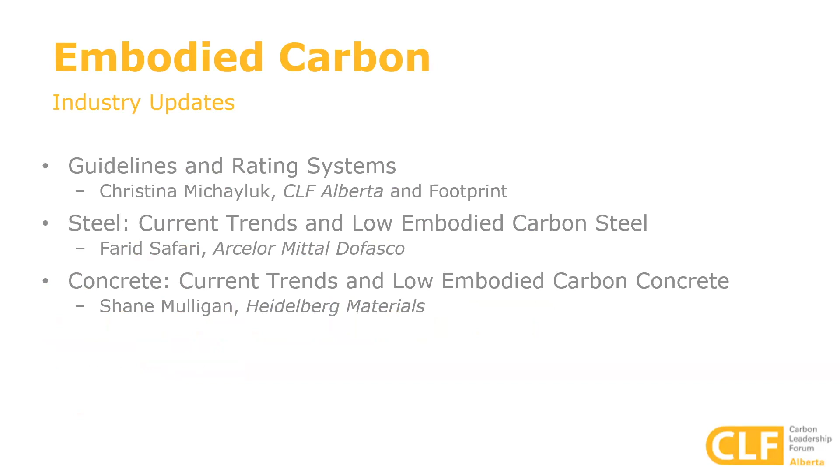So just to start briefly with the guidelines and rating system updates. I know that for those that are really familiar with embodied carbon or for those that are new into the embodied carbon realm, it can be a little bit overwhelming as things seem to be changing quite fast. Over the last couple of years, especially since the release of LEED version 4, we're seeing a large increase in the amount of life cycle assessments that are being required throughout municipalities and different jurisdictions, as well as certifications and standards that are coming up.

So some of the items that I wanted to talk about briefly in terms of guidelines and rating systems are some really exciting items that have been recently released. The first one I wanted to discuss was the National Whole Building Life Cycle Assessment Practitioner's Guide. The name does go on, but we can just call it the NRC Practitioner's Guide, as well as the recent release of the Zero Carbon Building Design Standard version 4 from the Canada Green Building Council, as well as the LEED version 5 public preview.

So just for brief information regarding the whole building life cycle assessment, as I mentioned, we are looking at something that's still really new to the industry, and there's a number of institutions and rating systems that have started adding embodied carbon and life cycle assessments into their own documents.

But through this, we do end up seeing a bit of an inconsistency between how each of these different bodies are governing how life cycle assessment should be done, especially in relation to the baseline design. And then even such things as what type of gross floor area should we be using, what's our specific definition for that, as well as really important guidelines on how we should actually be comparing an embodied carbon assessment from what is the proposed building to what is a baseline building.

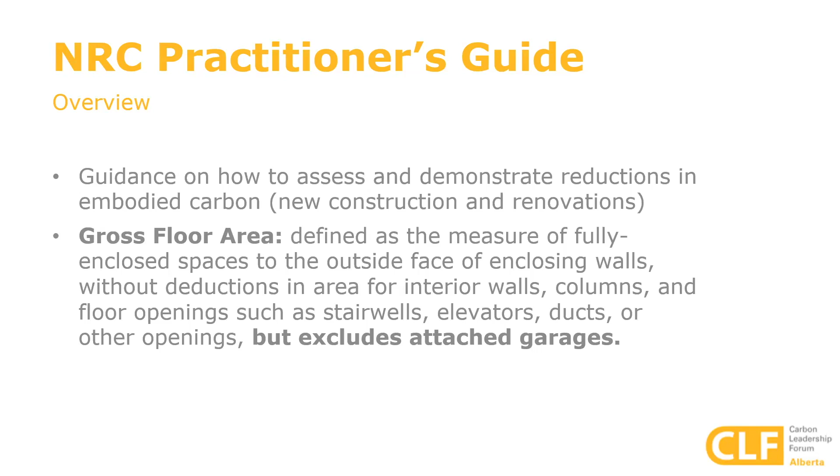Another exciting recent release was the Zero Carbon Building Design Standard from the Canada Green Building Council. So we are now on version 4 of this, and this is really, really exciting. This was just released on June 4th, and it is now open for registration. For those of you that may have been working on zero carbon projects under version 3, or were thinking about doing it, it is still actually open for registration until September, but there is a 2-year sunset on being able to get your project certified. So just be aware that if you are still looking at version 3, you would need to have that project registered before the end of September, and then it would need to be submitted to the CAGBC by the end of September in 2026, and this would be using your issued for construction documents.

So this one here is really exciting in that it's updated some language in terms of its reference documents. So now you can see it actually includes that life cycle assessment practitioner's guide that I had just mentioned earlier. But there are some differences in terms of the actual definition. So they actually use a different intensity number for gross floor area based off of the built floor area, which actually includes underground parking. So there are some differences between these different systems; what your result might be for a zero carbon building may not be what it is going to be for a LEED building or a building under a different system. This also provides some clarity on where you have multiple buildings that will be shared with an underground parking garage.

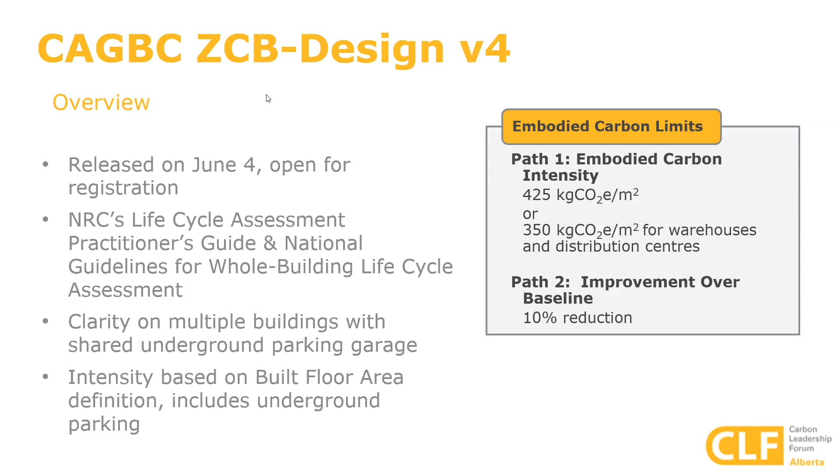And LEED version 5 — this one's a bigger section here. I'm not going to go over every single thing in the slide, but there are some very big updates to LEED version 5 in terms of embodied carbon. Version 5 was released for public comment in April, and I believe the comments have closed now — if that's incorrect, my apologies. This is going to be looked at as a future release in 2025, and there may be some minor updates based on the public comment that comes out.

In terms of the key impact areas, we're taking a look at decarbonization as one of the really big impact areas, in terms of operational carbon but also embodied carbon. Through that update, embodied carbon assessment is now considered a prerequisite, but how that's looked at is not necessarily a whole building life cycle assessment — it's a bit of a different scope of work, but they now prioritize it to the point that it's going to be required for all LEED projects.

In addition, projects pursuing platinum, which is 80-plus points, will actually have to reach specific decarbonization thresholds, which includes embodied carbon. It states that you need to hit 2 points within one of the specific LEED credits for this. Another important thing to note is that what we see pretty much across the line for life cycle assessments is that this includes the enclosure as well as the structural systems.

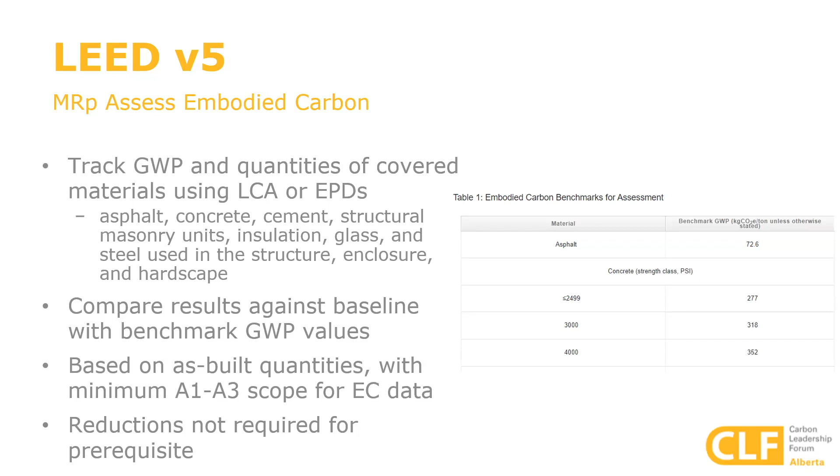So that was a very fast-paced, big look at the industry updates for guidelines and embodied carbon rating systems. LEED v5 will be looking at coming out next year, and the zero carbon standard is already out. But just one thing to keep in mind is that we want to make sure that we're looking at the definitions and understanding what our gross floor area definitions are. It's really exciting that we're taking a look at other ways of looking at embodied carbon, and it's not just going to always be a whole building life cycle assessment, that there's going to be other areas of opportunity as well.

First, a quick introduction on the impact of buildings on carbon emission. If we take a look at overall global GHG emissions, we see the different sectors contributing to it. On the right, you see buildings contributing to almost 28% of global carbon emissions.

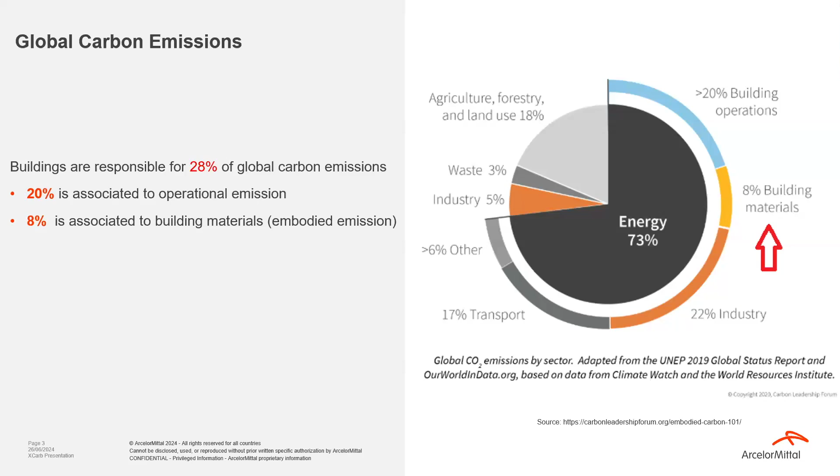Of that 28%, 20% is associated with operational emissions and 8% with building materials, which we call embodied emissions, which we'll go over. So that's how important it is—it contributes significantly to global carbon emissions.

If we define operational versus embodied emissions—this is from the CLF website—embodied carbon represents the carbon emissions associated with making building products and construction, from raw material extraction to manufacturing, transportation, and end of life disposal or recycling. You see different sections here: raw material supply, construction, installation, and the operation and use phase of the building, which is mainly about the energy use of the building, the operational carbon emission, shown in blue.

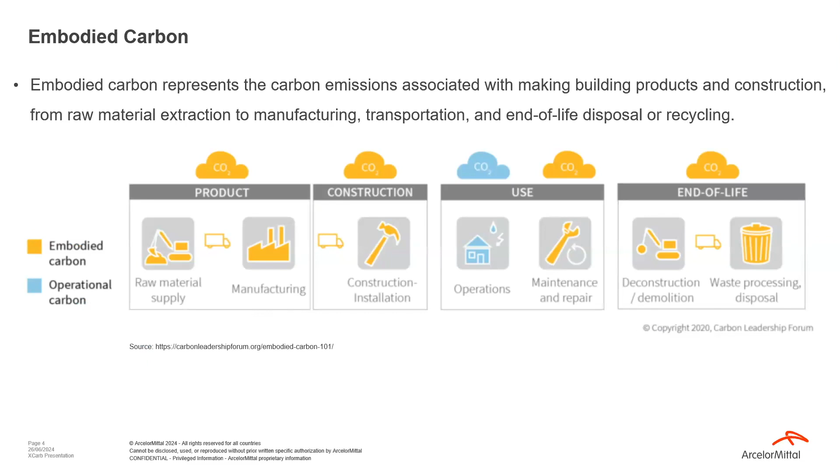And then why that matters. We know about climate change, global warming, and environmental problems, but in our business, why does that matter? It comes down to policies.

Federal greening government strategies and municipal and other level policies are being legislated for embodied carbon. The federal greening government strategy requires disclosure of embodied carbon in structural materials of major projects as of 2022, reducing embodied carbon in structural materials by 30% starting in 2025, and conducting whole building life cycle assessments by 2025 for major building and infrastructure projects.

Fortunately, you already described the details about LEED version 5, but yes, here also LEED requirements apply—you can get up to 6 points from embodied carbon reduction pathways depending on what you choose, plus there's a prerequisite for embodied carbon in LEED version 5.

Also, different cities and municipalities are day by day coming up with new policies on green buildings and embodied carbon strategy. The City of Vancouver is targeting a 40% reduction in new construction embodied carbon by 2030. Toronto, Edmonton, Calgary and other cities are just examples of how important this is.

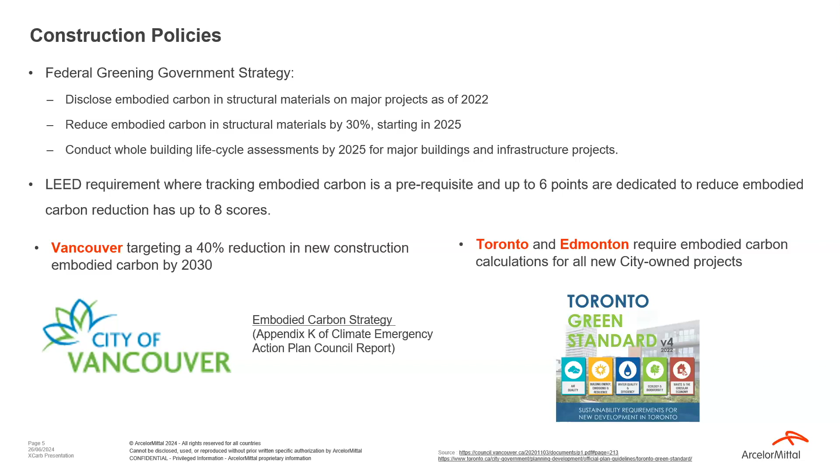Now that we know the importance of embodied carbon in construction, what do we do about it in steel? This is where our offering comes in—ArcelorMittal's offering of recycled and renewably produced steel as a low carbon emission steel offering, under the name XCarb.

What is it? If we look at conventional steel making versus the new processes: on the left, we have the conventional method using the blast furnace to make liquid iron for steel making, followed by the basic oxygen furnace. In the basic oxygen furnace process, a huge amount of CO2 is released in the operation, with the blast furnace being most responsible for the overall process of steel making.

In the other method of steel making, we have the electric arc furnace. This is the process where, using high voltage electrodes, either scrap as a recycled material or direct reduced iron is used to make steel—it's melted with that high voltage electrode. So it uses electricity, and depending on the grid's carbon intensity, it results in a low carbon emission steel if the grid is clean or low carbon.

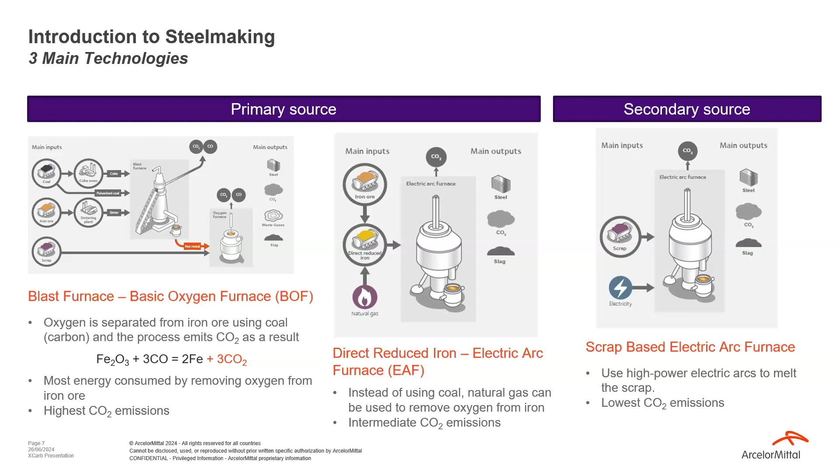So this is the one that we target in XCarb. And when it comes to secondary material, we see how it is on the global scale for steel demand over the years. Going forward, we have more secondary materials and scrap, and we can leverage it.

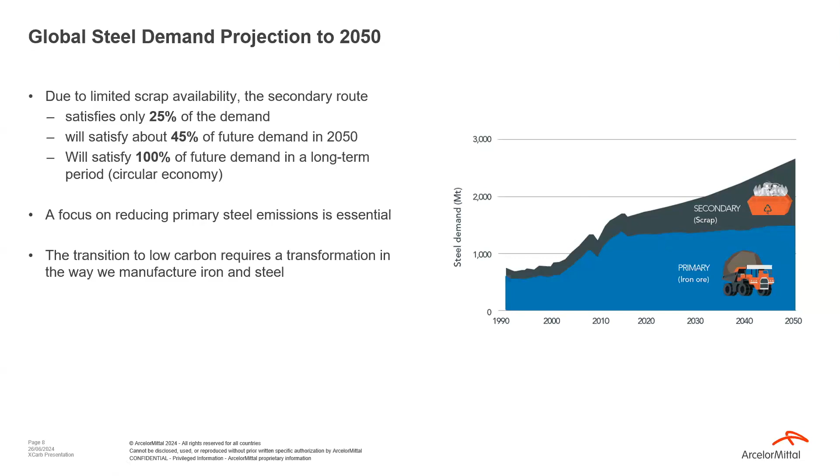But in North America, the situation is even better. There's a huge amount of secondary material that can be used for steel making. The transition to low carbon requires a transformation in the way we manufacture iron and steel, and using this secondary material is of high importance.

So XCarb, in a schematic, can be seen here: 100% renewable electricity guaranteed, certified with a renewable energy certificate to ensure that renewable energy using solar, wind, and hydro is connected to the same grid that our asset is using, and also a 70% minimum scrap content to ensure recycled material is used in that process.

It can go up to 100% scrap content based on the grade of steel and the application it's made for. In places where high impurities matter a lot, we can't go with a very high level of scrap content, so we usually go with 70%. Where it doesn't matter, it can go up to 100%.

Also, for the whole process, we performed the LCA, life cycle assessment, according to ISO 14044, and the assessment includes scope 1, 2, and upstream scope 3. That is independently assured and certified by DNV Consulting, and certificates were issued for XCarb.

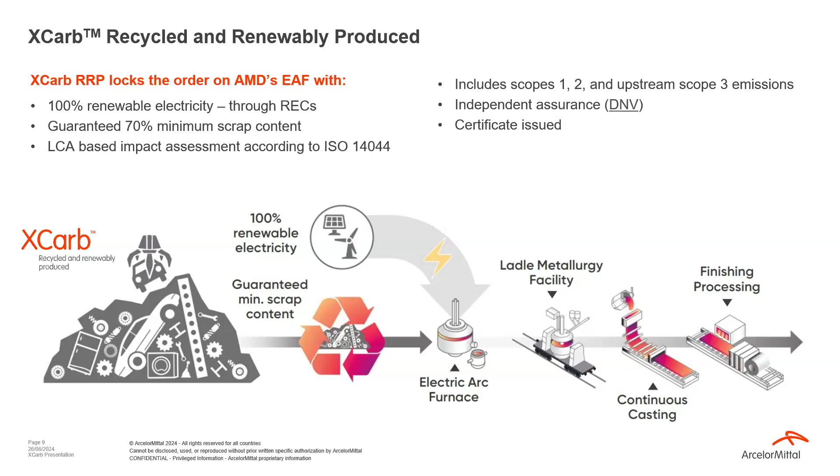So basically, XCarb guarantees the EAF process, minimum 70% scrap, and 100% renewable electricity.

Now getting more into the LCA process, how we performed it using the ISO standard, and also cradle to gate. So for the raw material here, this is the boundary defined by ISO 21930 for construction.

So for A1, which is basically raw material supply, and for the transportation, we use site-specific data for the Dofasco facility in Hamilton. That's the primary data that we use.

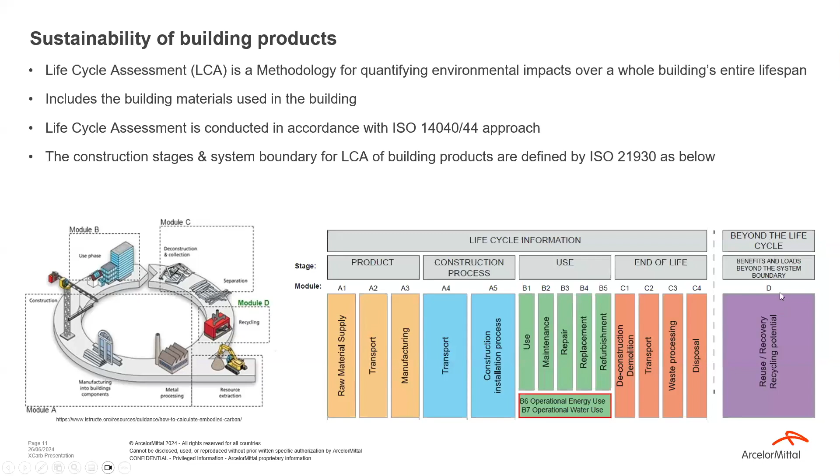And for the manufacturing, if it's the finished products, for the assessment we use manufacturer or industry average manufacturing data for the LCA. We also consider end of life and recycling, module D, which is optional to be reported in the EPDs.

So these are the different environmental impacts mandated by the requirements in the PCR, product category rules, to be reported for construction and steel products.

Global warming potential, which is the very important one, associated with embodied carbon, acidification, eutrophication, smog formation, and non-renewable energy demand.

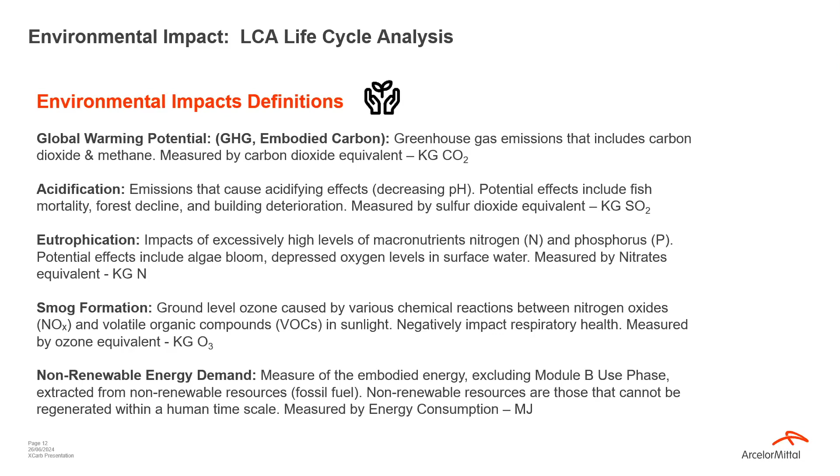And then as a result of this process, for the XCarb process, EAF, renewable electricity, and the LCA that I explained, we came up with the EPDs.

That's like a commercial asset to ensure the embodied carbon for the steel products, for the flat roll products at the gate of our company, as well as some finished construction products that you see here: 5 finished construction products, including steel cladding and roofing, steel deck, cold form section, hollow structural section, as well as corrugated steel pipe, which is used for culvert and drainage applications in municipalities.

And for the steel coils that go out of the gate of our facility, we use, as I mentioned, the primary data from our operation.

For the manufacturing of finished products, we use industry average data for Canada, using information from associations: the Canadian Institute of Steel Construction and Canadian Sheet Steel Building Institute. For the corrugated steel pipe, we use data from the Corrugated Steel Pipe Institute.

And all these EPDs are third-party reviewed and verified, and available free on the Dofasco website, which is here—the address—and you can access it.

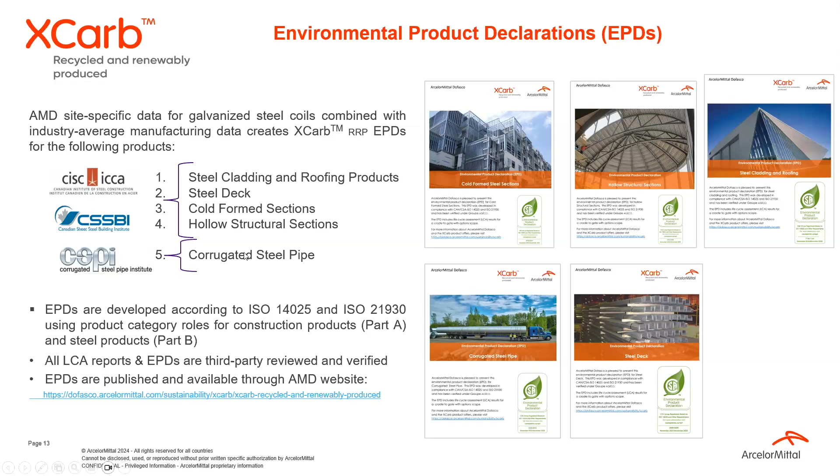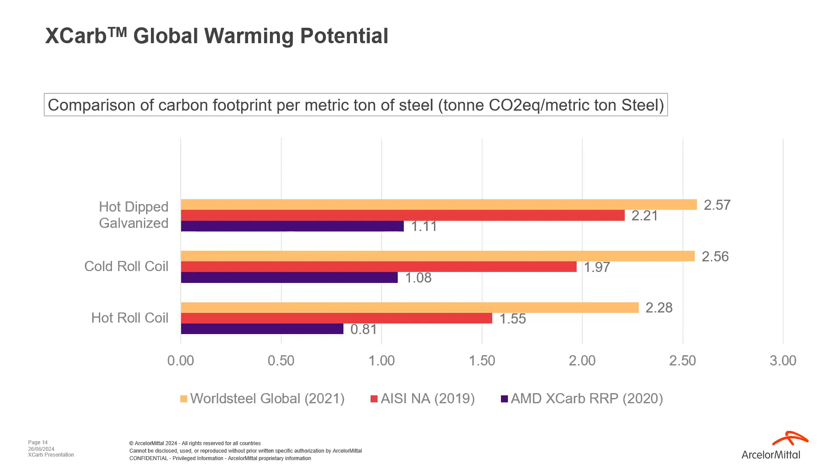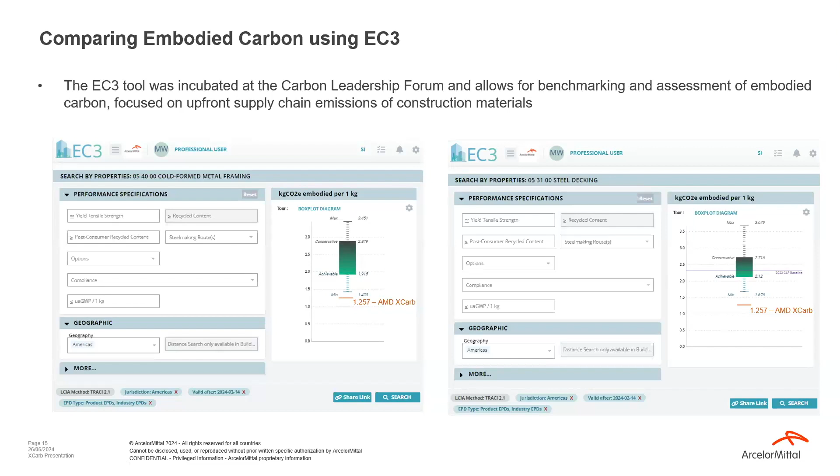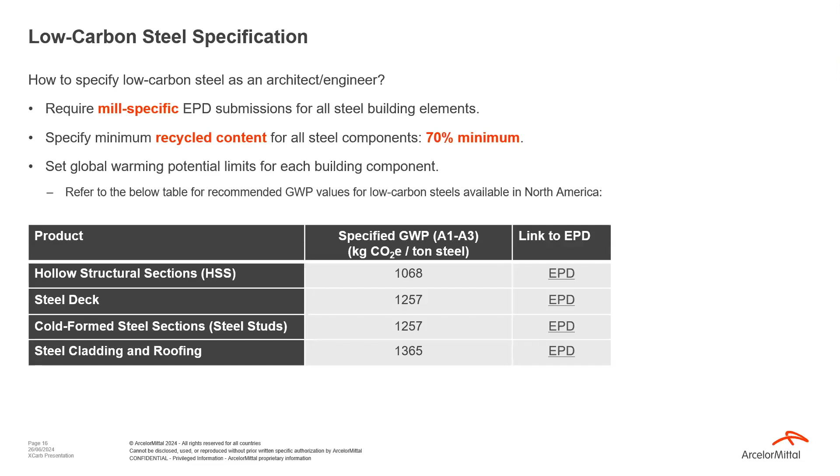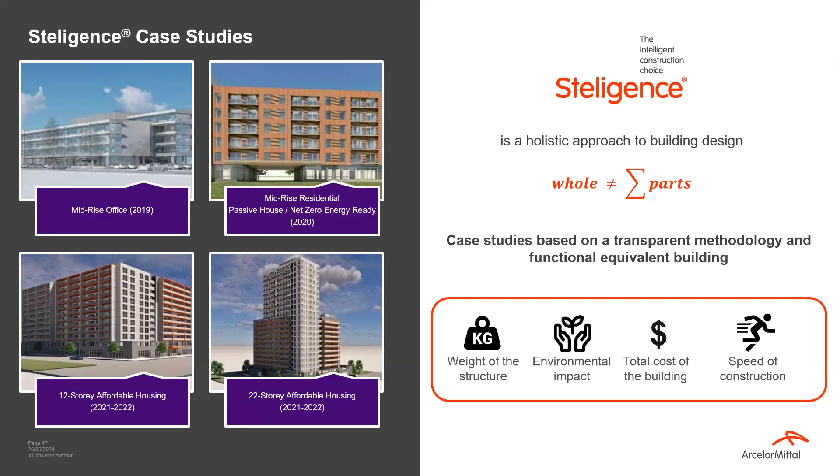We are in the process of implementing the XCarb offering shown in this presentation—those low emission values—into this Steligence initiative to show the competitiveness of steel in building construction. If you have any questions about the XCarb offering or our low carbon emission steel, feel free to reach out to me. For Steligence, our project manager, Matthew Winters, will be ready to answer questions or present upon request about our Steligence projects.

Thank you. Thank you, everyone.

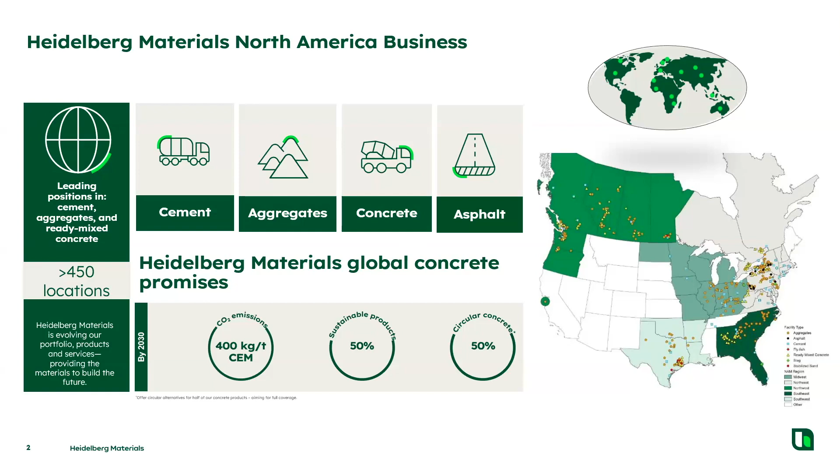So you've all seen the stats, I'm sure, on sessions like this previously, or presentations around embodied carbon, that cement and concrete contribute very significantly to the embodied carbon footprint of a given building, as well as global greenhouse gas emissions. And I think the industry has been very progressive and active and proactive in getting ahead of this issue. We ultimately represent 5 to 8% of global greenhouse gas emissions, largely driven by the fact that we're the second most utilized substance in the world next to water. And as a result, we have a large amount of emissions that we need to reduce.

And at the global level, with the Global Cement and Concrete Association, Portland Cement Association in the US, and Cement Association of Canada, over the last couple of years, all of these industry associations have published roadmaps to the goal of net zero concrete by 2050, and highlight all the different technologies and levers that the industry is going to utilize to get towards that goal.

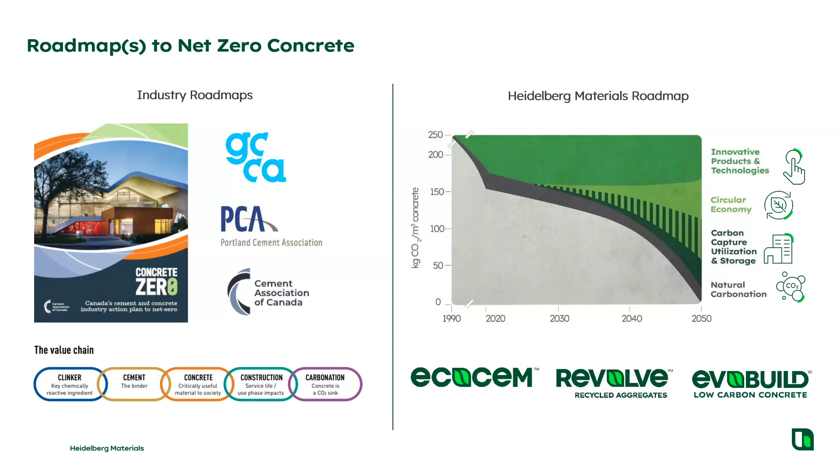As Heidelberg Materials, we are part of all these industry associations and committed to these same targets, but also have our own roadmaps that we've developed at global and national levels, which is ultimately going to bear out in the products that we have, whether it's lower carbon cements, recycled concrete aggregates, or low carbon concrete.

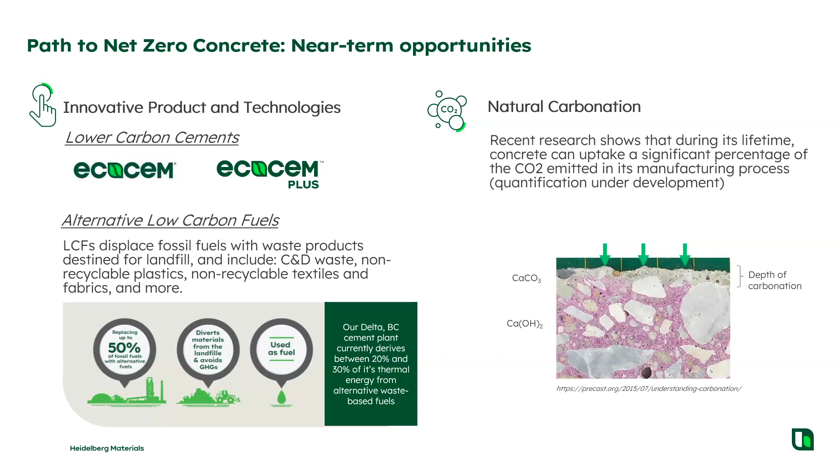But when we're talking about low carbon concrete, where we're at today, we definitely get the benefit of anything that happens upstream with cement production. But from a concrete perspective, we have a lot of different engineering levers at our disposal that help us to reduce the carbon intensity associated with our products.

The big lever that everyone's likely familiar with, the supplementary cementitious materials or SCMs. These include products like slag from the steel industry or fly ash from the coal industry. I'm sure many are aware in an Alberta and prairies context that fly ash and coal are going away as a result of the 2030 goals that the province has set in terms of shutting down coal plants. So certainly the fresh supply of fly ash is likely to disappear over the next several years.

But we're not concerned as an industry. There's many decades worth of fly ash that has been built up over the years at different landfill facilities, and it's already in the CSA codes and standards for cement and concrete that allow us to go in and harvest and process that fly ash to create a product that's going to perform the same as fly ash and continue to do the work that it does within a concrete mix and reduce the overall carbon intensity.

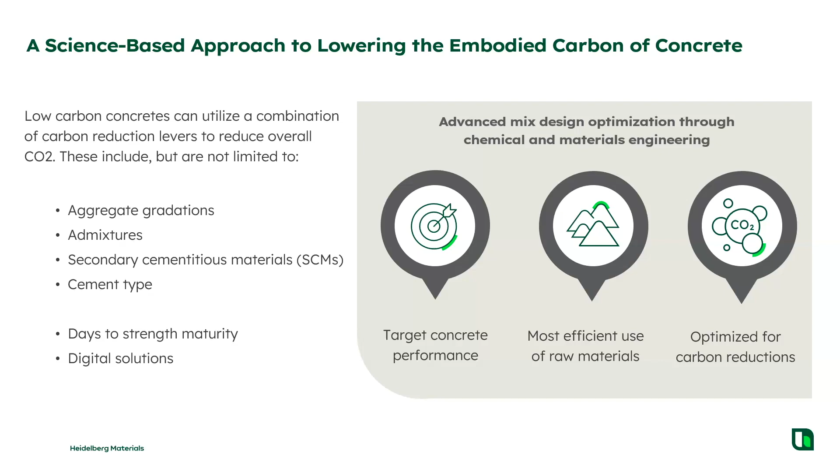How we measure the impact of all these different levers is through the use of environmental product declarations. At our Heidelberg Materials facilities throughout North America, we've invested in the ability to generate product and facility-specific Type 3 EPDs. There are a number of different producers throughout Canada that are undergoing this or have them currently available, and you're going to see it really take off over the next several years. I think it will become the standard as part of doing business as a concrete producer, much like mix tickets upon delivery. But they're not without their challenges as well.

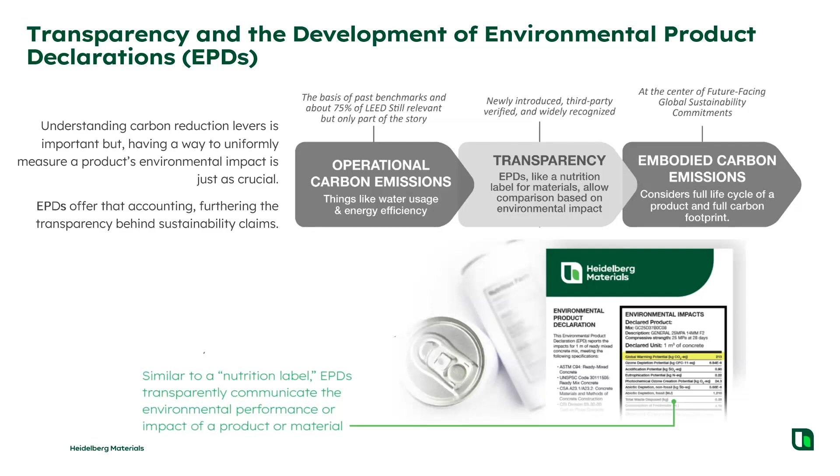EPDs are very specific to the mixes that they're designed for, and they create some administrative challenges when it comes to what is published, how that's managed, how it's replaced, how it's updated, and then ultimately how it's being used. Worth knowing for concrete is, most people are concerned with one number on an EPD, which is the global warming potential or carbon intensity. But that one number is generally built of three different numbers that are the different modules from the LCA process as part of an EPD.

Module A1, of course, is the extraction and upstream production of the raw materials, which in concrete's case is very much disproportionately driven by the cement, or more specifically, the clinker content of that concrete mix. That's the main driver when it comes to all emissions that are associated with concrete. Module A2 is the transportation of the raw materials to the manufacturing facility, and this is very dependent on your haul distances and what mode of transport you're utilizing. Generally speaking, the transportation of aggregates is the biggest contributor to this module.

And I like to use the example of Vancouver as being well advantaged in this space, where most of the aggregates are transported in the Metro Vancouver area using barges, which is about an order of magnitude less carbon intensive than trucking of aggregates. But in a landlocked area like we are in much of the prairies, that's not an option. We have to utilize trucking, unfortunately, or rail in select examples where that might be possible. And as a result, the carbon intensity associated with concrete in the prairies is higher than it would be in Metro Vancouver.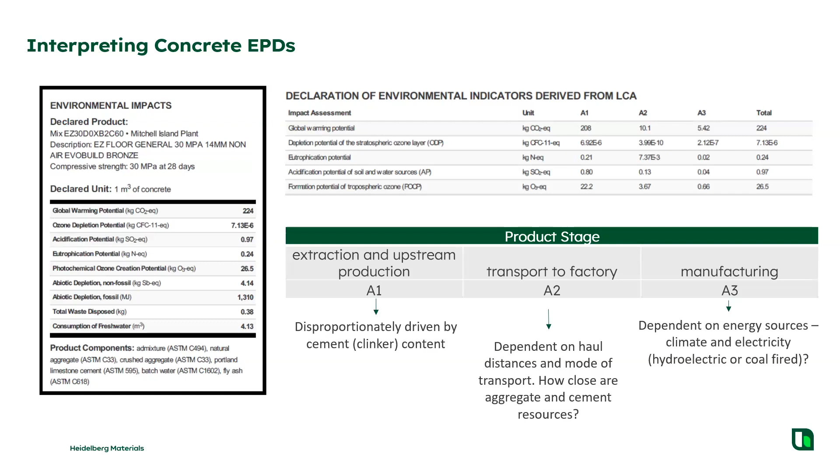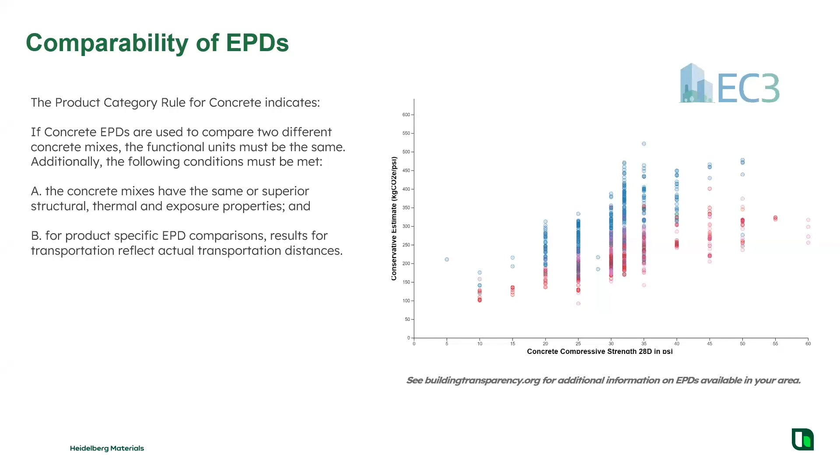And that brings me to another one of the challenges that we have with EPDs. So right in the product category rule for concrete, it states that concrete EPDs can only be compared to one another if they have the same or superior structural, thermal, and exposure properties. And the unfortunate thing about that with EPDs is that a lot of those properties for concrete are not mandatorily listed on an EPD. And EPDs can vary quite widely with concretes, depending on strength, depending on exposure class, and many different project specific considerations in terms of if it's pumpable or not, availability of raw materials at the time of issue.

So really wanted just to highlight for this group on the call today that there's some great tools out there, like the Embodied Carbon in Construction Calculator. It's going to be very powerful in time to enable designers to have an insight into what different carbon intensities are possible for different concretes. But right now, most of those concretes aren't comparable because you don't have the context necessarily, unless it's explicitly listed on the EPD, that it's the same exposure class for the same type of application. So it makes the job very hard for designers to interpret these properly, and it makes it hard for the concrete producers to make sure that they're managing that data properly and publishing the right sort of information.

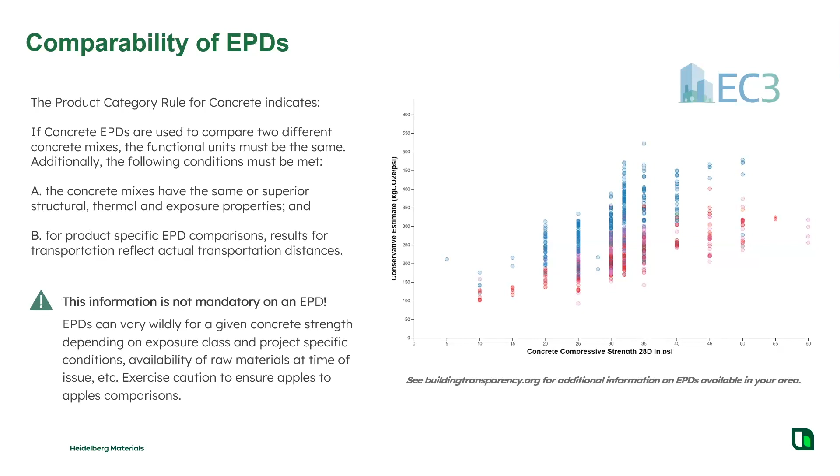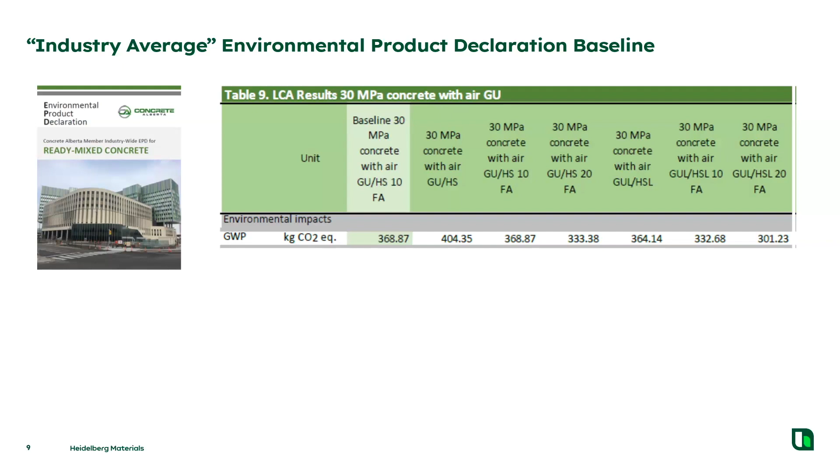Other EPDs that you might be familiar with are the industry average environmental product declarations, and there was the national one that was published back in 2017. And in 2022, there were more regionally specific industry average EPDs. The Alberta one is highlighted on the screen. Generally speaking, the one value that's important to designers, or the one that we'd like to be most important to designers, is the light green highlighted column, which represents the recommended baseline for the specific strength of concrete that's being specified. In Alberta's case, that generally refers to a type GU cement concrete mix with 10 to 20% SCM use, depending on the different strength and exposure class that it's addressing.

All the other columns to the right are intended more for concrete producers that don't have the ability to generate product-specific EPDs, so that they can attest that their concrete is approximately equal to the different designs that are denoted there and submit those GWP values as part of their ability to demonstrate adherence to a given specification or policy. And ultimately, what they're able to demonstrate through that is about a 10 to 15% reduction, depending on the mix, as a result of using either Portland limestone cement or the higher use of SCMs.

The one caution I would issue when it comes to the use of the industry average EPD is that sometimes they're not based on strictly air or no air designs. It is important to pay attention to the exposure class when it's listed, because as an example, some of the mixes are for an exposure class C-XL, which by virtue of the CSA standards actually are representative of 56-day mixes as opposed to 28-day mixes. So there does need to be some discussions between the concrete producers, the structural designers, and the design teams that are setting these different baselines and thresholds for their projects to make sure that there is an understanding of the concrete that's ultimately being called for and what the implications are from a carbon intensity perspective.

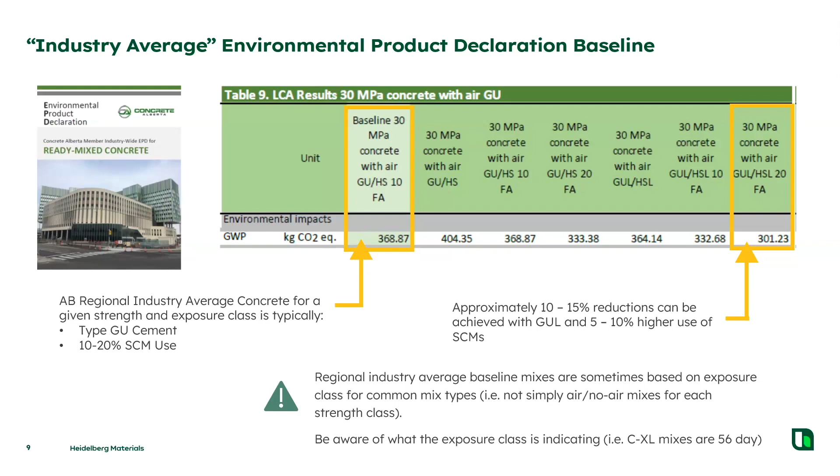I would highly recommend the use of this document in terms of informing your projects and how to specify lower carbon concrete. This is Concrete Canada's guideline for specifying low carbon ready-mix concrete in Canada, and it provides step-by-step guidance in terms of generating a carbon budget for concrete, which has a designer outline all the different concrete elements they're looking at, the corresponding strength and exposure class, and then a corresponding maximum GWP value or threshold.

Ideally, that's informed by regionally industry average EPDs, but the designer is ultimately able to make that decision themselves.

The one thing I would highlight from this document, which is very important, is that if you encounter a concrete mix that is not listed in an industry average EPD, or you're dealing with a special case like a high strength concrete, the recommendation provided is 130% of the corresponding strength class for a given element. So if you had a high strength footing, you would be taking 130% of that 318 value to represent a high strength edition of that mix.

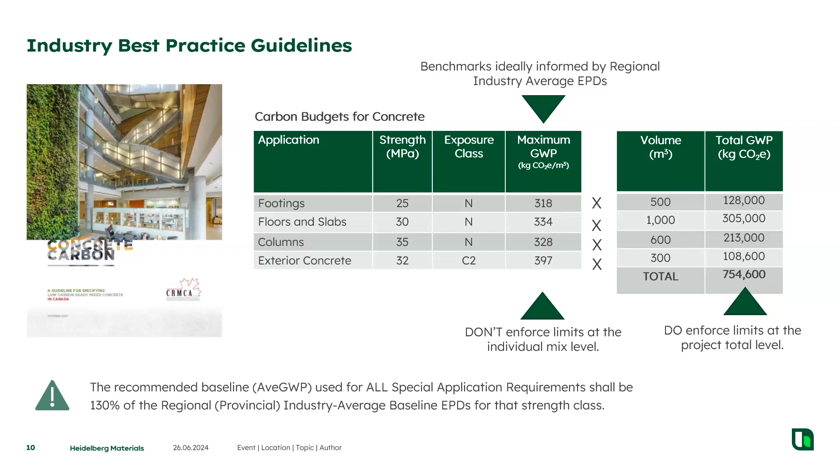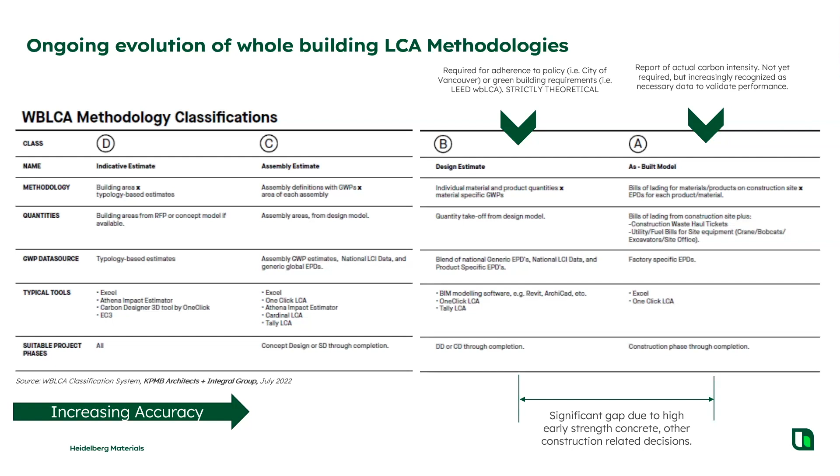I can see I'm running a little short on time, but a couple of the key things I wanted to highlight were the gaps that we're starting to see between design level whole building lifecycle assessments and as-built whole building lifecycle assessments. The one that's most important, of course, is the as-built design in terms of what was actually delivered on site. But we're seeing quite a disparity between the design level estimates and as-built because of these high strength applications. Often, certain elements in a building, like suspended slabs in a high-rise, are going to use higher strengths, but that's not necessarily reflected at the budgeting stage for these whole building lifecycle assessments. So having those early discussions with the general contractor, the concrete producer, and the designer is very important to ensure that's properly addressed.

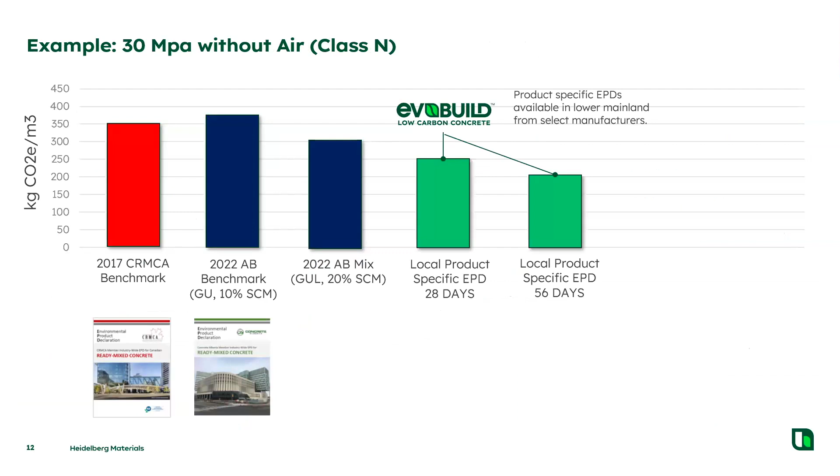With my last couple minutes here, the only thing I wanted to highlight is that at a mix-to-mix level, you have the industry average EPDs available. Some concrete producers are able to provide mix-specific EPDs. They might be able to generate a couple different options for you to look at in terms of 28-day mixes, 56-day mixes. The EC3 calculator can help identify who those concrete producers are.

And in the not too distant future, we're going to have carbon capture utilization and storage in Alberta. One of the key levers in the Canadian Net Zero Action Plan is the use of carbon capture and storage technologies. We're blessed in the province of Alberta that we're going to have the first carbon capture utilization and storage plant in Edmonton. Heidelberg Materials is in the process of making a final investment decision to go forward with this project, which would ideally be completed in 2027, giving us net zero cement in 2027, 2028, which is something to be quite excited about in the province of Alberta and across North America.

And with that, I will yield my time to make sure there's some left over for questions. Thank you.

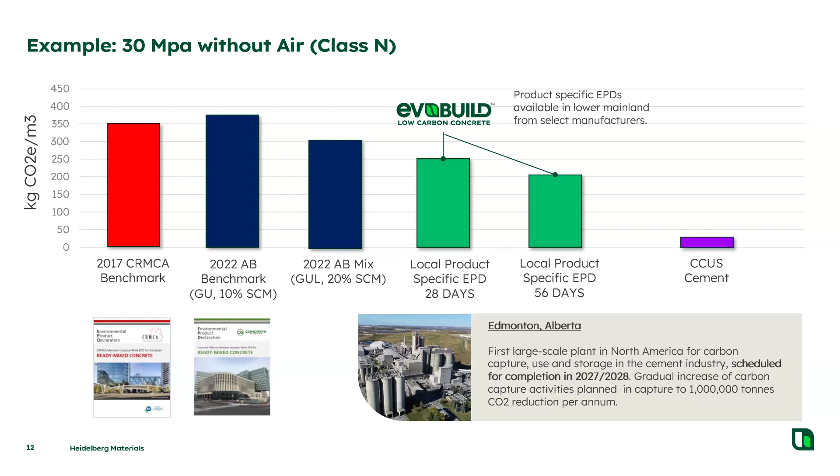Thank you so much, Shane. We already have some questions popping in here, but I think it's really great that you're highlighting that there are some challenges we're dealing with in terms of LCA still being quite in its infancy, and we're all trying to figure things out as we go along. Hopefully these NRC guidelines, as well as other additional guidelines, are helping us out as well.

So we actually had a question for you, Shane, from Camille. Could you possibly define exposure class? I know you went over a little bit there in terms of things to consider, but are there some great documents that would be advisable for exposure class, or guidelines you would recommend for people doing early LCA analysis?

Yeah, so the best guidelines for exposure class are the CSA specifications for cement and concrete, A23.1/A23.2. It provides a breakdown of all the different exposure classes that concrete might be subjected to, in terms of: is it in a high chloride environment, is it a high sulfate environment, is it subjected to freeze-thaw, et cetera. All those impact how the concrete is ultimately going to be designed to withstand those different exposures. So it is important to bring them into consideration when designing and selecting your carbon intensities.

Oh, you're on mute, Christina. I feel like I'm new at this apparently now.

So I have a question from Trevor for both Shane and Fareed here. In terms of the research and development budgets for both of your companies in order to achieve low carbon materials, how are the budgets? Are they being generous? Is it innovative in that sense? I would be interested to hear from both of your perspectives.